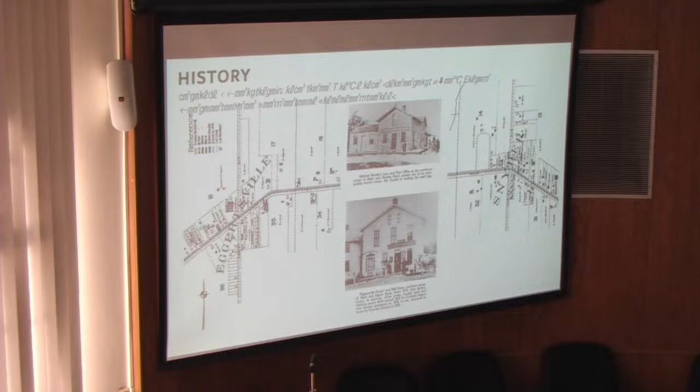I know you're giving away some secret algorithm here. Shocked that our account's PowerPoint fonts aren't... I don't think it's a funny font either, I'm really surprised, I think it's like Arial. Shocked. Hopefully the PDF will be better. I'm sorry about that. It's okay, we're just going to take a minute to reload that. You're fine.

The Amherst Main Street final presentation. I'm more interested in the Fort Myers coastal Florida one. I can give you that one later.

Yeah, you may want to try the PDF, the PowerPoint might have the same issue. Well, that looked like he was running off of the PDF, so I'm wondering if it was our Acrobat that was misreading it.

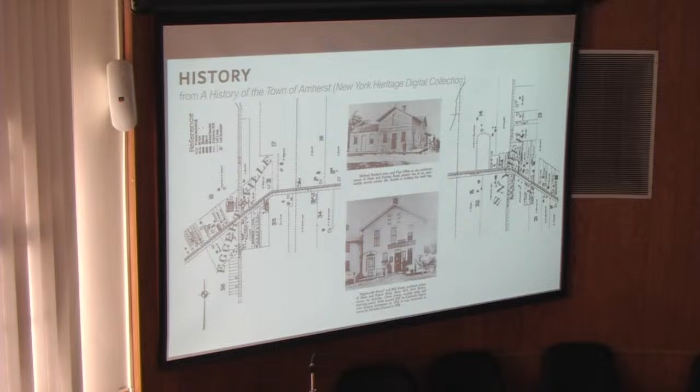As I mentioned, this was the study area. We looked back at all of the history of planning that's been done for this area, including the action plans done in the early 2000s, looking at the comp plan, building upon all of this past work and thinking about the plan for the corridor. An important study we looked at was the regional transportation pedestrian bike plan for Buffalo, Niagara. This corridor is set as what they call a tier 2 bike route, important from Bailey all the way to Harlem Road. So something we're thinking about is helping implement that idea, improving the bicycle conditions on the corridor.

I'm going to turn it over to Sarah now to walk through more of the existing conditions analysis. Thank you, everyone.

So we took a first look at the traffic analysis of the corridor, again from Main Street, from Bailey Avenue to Kensington Avenue. We set out and did turning movement counts, and ATRs, setting tubes out to collect speed, vehicle classification, and volume data, as well as pedestrian and bicycle counts. We did that in December of 2023. I'd like to point out that Main Street is a New York State DOT road. It is classified as a principal urban arterial, and it is on the national highway system. So that's something to keep in mind as we think about certain design criteria set by DOT, things like travel lane widths, shoulder widths, and bike accommodations, which will come into play later on.

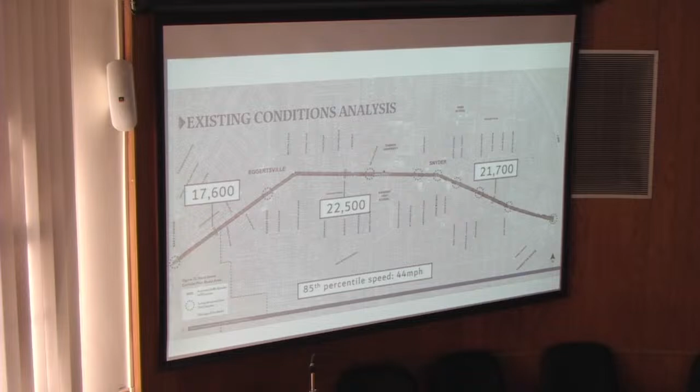We collected pedestrian and bicycle data and determined that the busiest pedestrian locations were at the intersections with Campus Drive, Harlem, and Chateau. We did not note any existing bicycle infrastructure, and bike counts were pretty low, which could be attributed to the fact that we collected the data in December of 2023. Here are the pedestrian and bicycle counts.

We also collected parking inventory on two different days: midday weekday data and evening weeknight data. This graphic shows the overall restrictions along the corridor, where parking is allowed, where it isn't, and where there are restrictions on how long you can park. We have a summary in our executive summary about how many vehicles actually occupy those spaces, and I think you might be surprised to see it's pretty low overall, given the number of spaces available compared to how many were actually occupied during the day and evening.

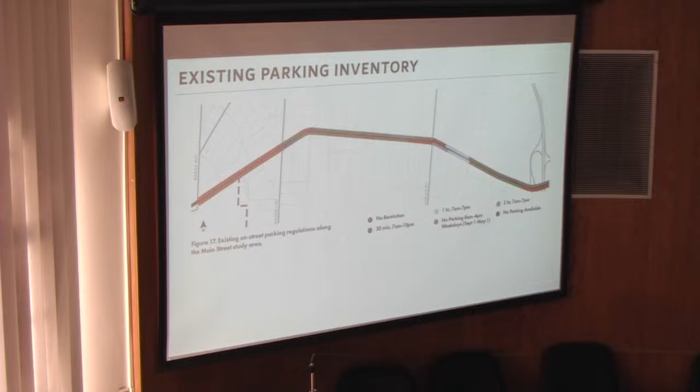We also collected existing signage data, going through and inventorying every single sign out in the corridor. My understanding is some of these have changed since then, but we noted regulatory, warning, guide, and other signs. Some are required, like speed limit signs or no parking signs, while others are more guiding, like signs for a library or a welcome sign. We noted all of that because part of the corridor plan is addressing sign clutter and what we can do about it.

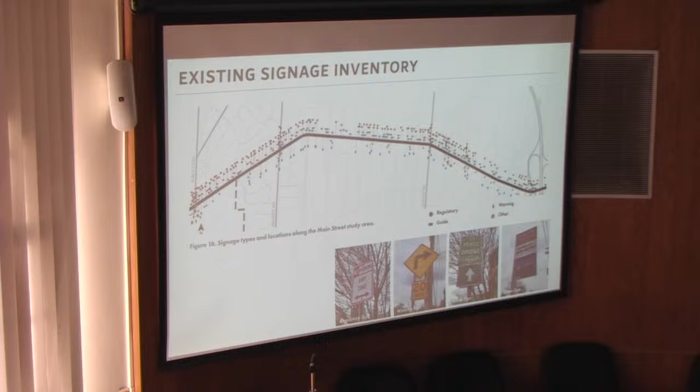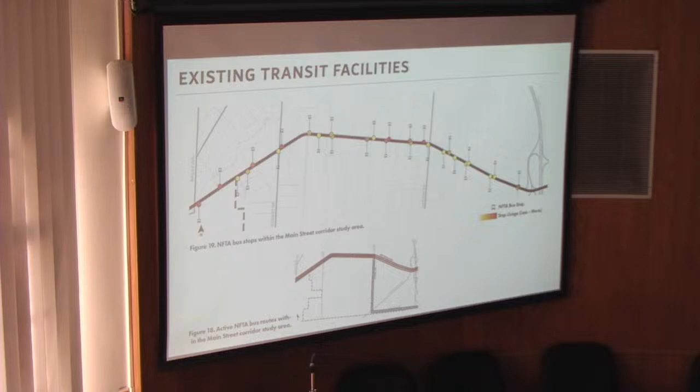We looked at the existing transit facilities. NFTA has two routes that run this corridor, and we were able to get data from them on their on and off averages per day, showing which stops are utilized more than others. You can see that information here in the graphic, with red being the higher utilized areas and yellow being the less frequent stops. Overall we're seeing relatively lower numbers on this corridor, but it's good to have that data to build into our overall recommendations.

We generally looked at vehicle crashes along the corridor to see where there were some hot spots, and you can see it's pretty frequent where those crashes could be happening. We didn't get into a full crash study on this, but it is part of one of our recommendations for the future that could be looked at.

And I'll turn it back to Amy.

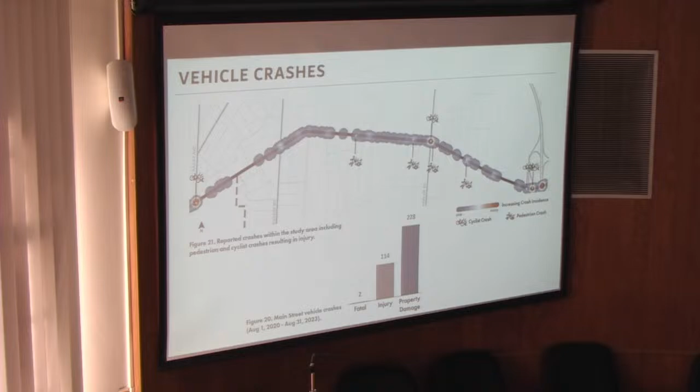As Dan mentioned, we started with a charrette last January at Daemen University, and had a good crowd come together. We asked them if they were residents, business owners, or property owners, and most were two or more of those. Also important to note, 80% of the folks, when we asked which intersection they live closest to, many were from the area around Main and Harlem. We thought that was interesting to note.

We asked how they use the corridor, and with conditions as they are today, 86% drive daily. Not many folks at that meeting came by bus, so we did some additional outreach, talking with the folks from the transit agency to learn more about priorities on the corridor. 48% walked daily. There was some discussion about the weather when it comes to bikes, and if we'd asked this question not in January we might have gotten different answers, but there were some folks who biked.

Importantly, we asked if there were better conditions for walking and biking, would people want to use those facilities, and 75% said yes. We also asked about what's important for the future design of Main Street. We gave them a long list of things to choose from, and safety, improving safety, reducing speeds, and having safe crossings came to the top of the list.

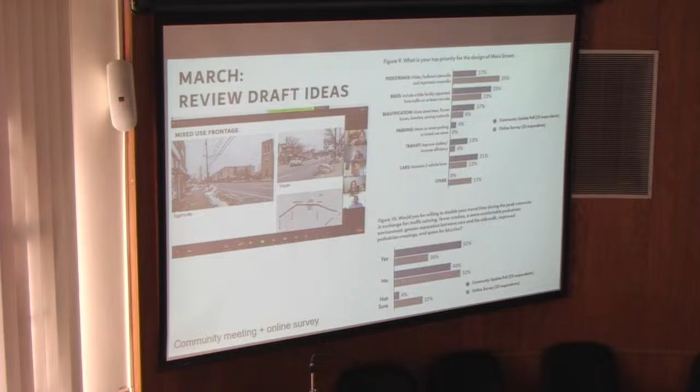Lots of discussion of beautification, landscaping, street trees, and then some talk about improving transit along the corridor. We then followed that by having a couple of days of an on-site studio where we had additional stakeholder meetings and invited folks from the community to come in and talk further with us and share their ideas. From all that feedback, we did some draft designs, and then in March we had an online meeting where we reviewed a couple of cross sections that I'll share with you shortly, and got feedback from those. And all of that input informed the final report that you see, which includes a summary of all the work done, plus a draft concept plan laid out across the corridor.

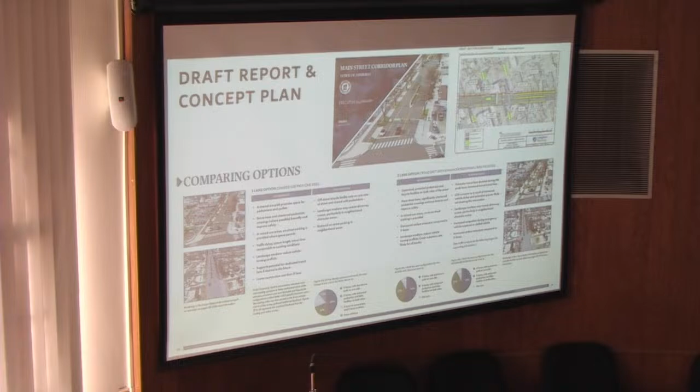So talking about the design ideas, I started talking about the history of the corridor and how there's these different areas. What we realized pretty quickly is that there's not going to be one solution that works along the entire corridor, so we've divided it into a few different areas: the mixed-use frontage areas, which are the darkest blue, and the neighborhood frontage areas, which are the light blue. The neighborhood frontage is where buildings are set back further, with front yards, a different feel than the mixed-use area where buildings are up to the street with commercial uses. A third area, the university, is kind of a hybrid of those, and I'll get into that in a minute. But I'm going to walk through each section, starting with the mixed-use area.

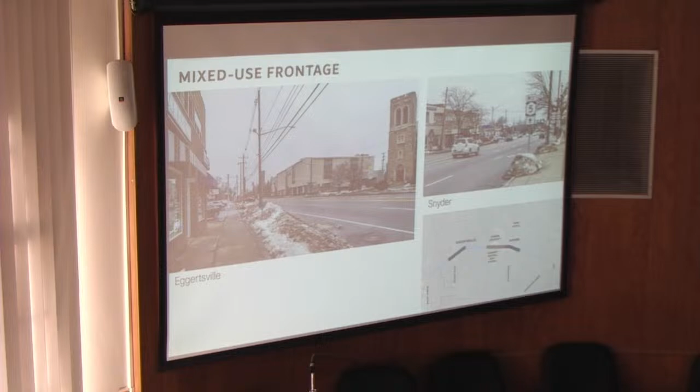Again, the areas near Eggertsville and Snyder, and this is the cross-section. Looking at the top, that's the existing conditions, and below is the proposed. The couple of big ideas, I guess pointing over here: looking at the right side of the road, adding a 10 to 15 foot shared use path, a dedicated facility for pedestrians and cyclists that's buffered from the street with a planting area along the entire north side of the road. So that's the big intervention. Plus, you'll notice another difference from existing to proposed is, where possible, adding medians into the center of the street space.

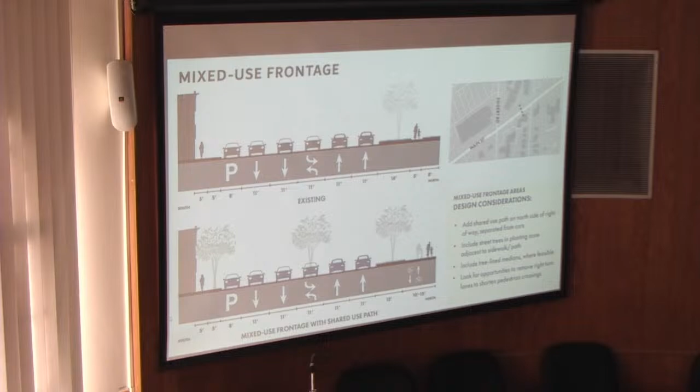We also thought about the long-term future. What if there's an opportunity for including dedicated transit lanes? This idea of keeping 2 lanes in each direction means that in the future, if this becomes a transit corridor, you could have dedicated transit lanes going in each direction.

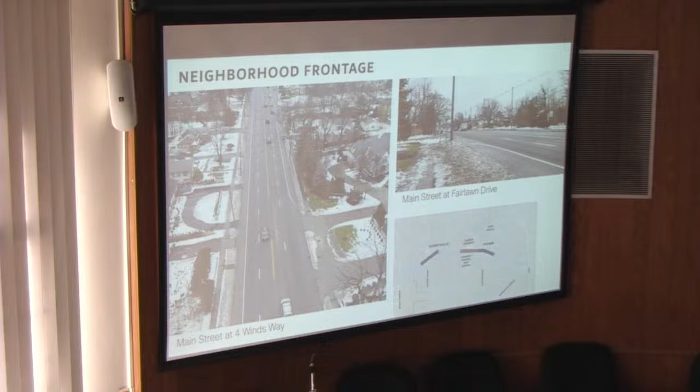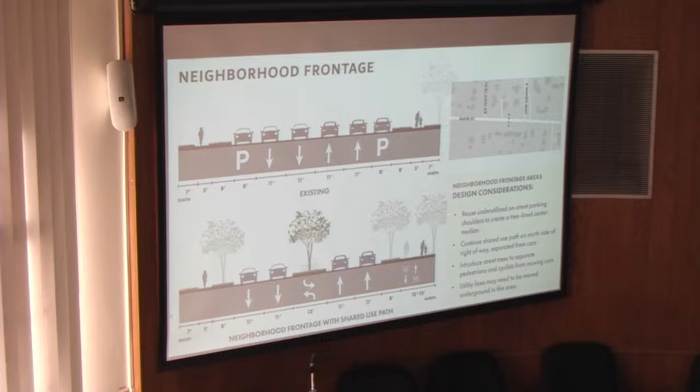So looking now at the neighborhood frontage, this is the area just west of Daemen University near Four Winds Way. You can see the conditions are a little different - buildings are set back. This is the existing conditions at the top and the proposed conditions at the bottom. The big differences here are looking at moving, still having 2 lanes in each direction, but having a dedicated median space in the middle for trees, and still having that dedicated 12 to 15 foot shared use path on the north side of the road.

And again, there is that opportunity that in the future, should this become a transit corridor, we could still have space to have transit lanes in each direction as well.

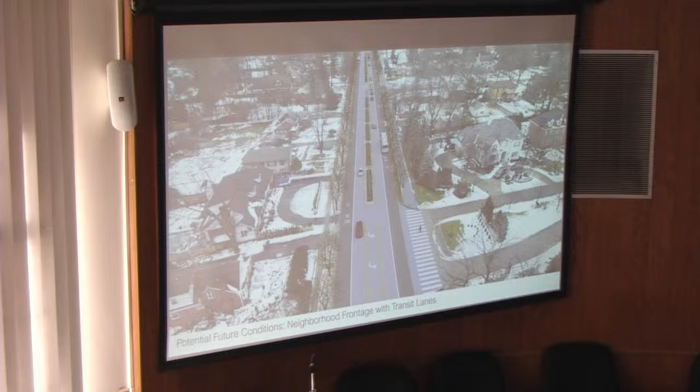There was a lot of discussion about landscape medians. The idea for beautification had a lot of support, but also some concerns about maintenance. So we discussed how to make that easier. The ideas in the report are that there's not planted grass, but rather landscaping that wouldn't require that level of mowing and maintenance.

But the important thing is to have trees, which provide a visual cue to slow speeds down, which was one of the big ideas. So you might notice in the drawings, the medians still include trees, but they were just shown without a grassy strip in the middle.

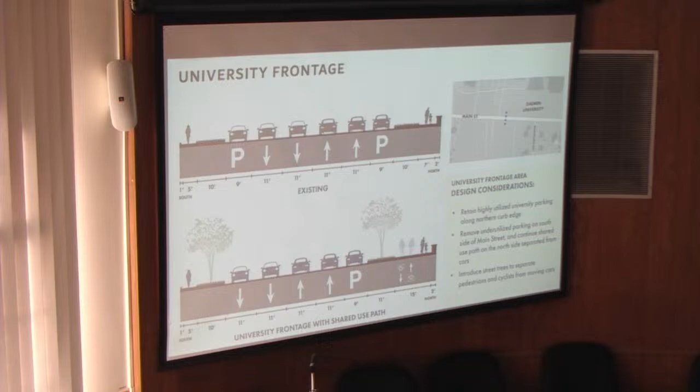We also, in March, when we presented ideas, showed what we call a road diet, where we take 2 of the travel lanes and reuse them for other things. So in this scenario you would have 1 vehicular lane in each direction, and then have a wider space for dedicated bike lanes in each direction, plus sidewalks, plus landscaping.

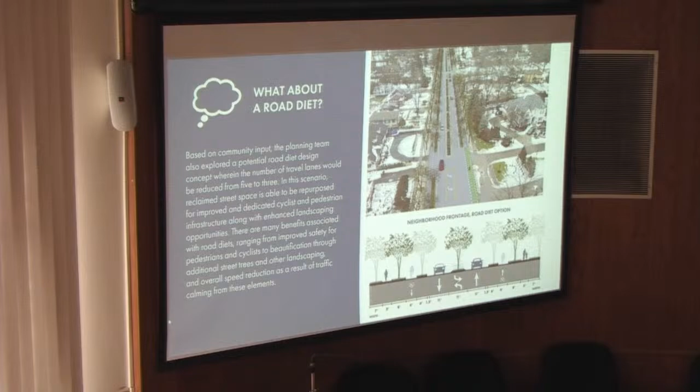So this is the illustration for the mixed use frontage, and this one is the illustration for the neighborhood frontage. This was the ideas we presented in March to the community, because we did want to get feedback. There are trade-offs with every design solution that you have to accept, so you have to make some decisions about what's most important. We wanted to get some feedback before we moved forward.

And so I'm going to ask Sarah to come up and walk us through some of the analysis that went into that.

So in order to evaluate if we could consider a road diet for this corridor, using all the traffic data I mentioned that we collected, we looked at multiple considerations for the corridor, including level of service, delay, queue, travel run time, and carbon emissions. Those are all factors that would help us evaluate and present to the public the different options, the alternatives between a 5-lane section and a 3-lane road diet section.

Based on traffic data that we collected, we did see a peak volume of traffic from 7 to 5 every day. So it wasn't just an AM peak and a PM peak, it really was a high concentration of vehicular volume throughout the day.

We also looked at level of service, understanding the delay of a vehicle at a signalized or unsignalized intersection. We specifically looked at 10 signalized intersections along this corridor, keeping in mind level of service A really being a priority for vehicles and not as great an environment for pedestrians or cyclists, whereas an E or an F is a much slower experience.

You might have to sit at a signal for 1 or 2 cycles as a motorist, but it is a much slower environment for pedestrians and cyclists to maneuver through.

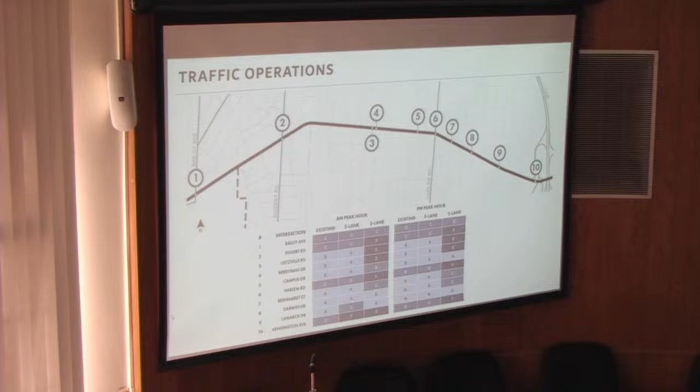We also calculated corridor travel time, the length of time it would take for a vehicle to get from one end of the corridor to the other. We went in both directions, from Bailey to Kensington and back.

And with that, we saw that the increase in travel time to get from point A to point B doubled from existing conditions in the future 3-lane section. We're seeing that the 5-lane section remains relatively the same, if not better.

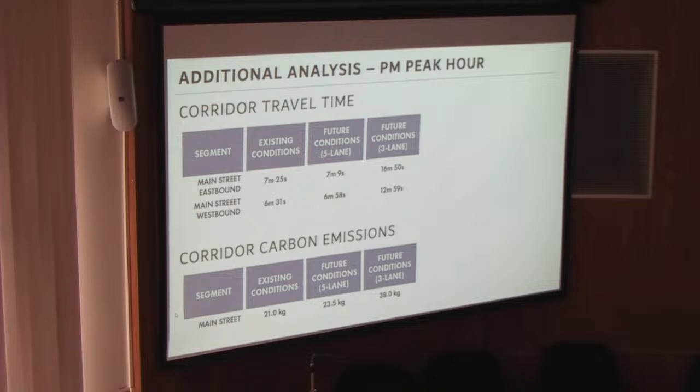We also looked at carbon emissions. Again, that's another factor of looking at road diets and how many more vehicles are on the corridor for a longer period of time.

We're seeing that carbon emissions increased in both conditions, a little bit more in the 3-lane. So to compare some advantages and disadvantages of a 5-lane section: the shared use path, similar to the 3-lane, will provide space for pedestrians and cyclists.

We're able to provide street trees still and shorten crossings. We're still able to provide on-street parking in the mixed-use areas. We do see some traffic delay and queue distance, but pretty negligible changes compared to existing. Again, the landscape medians are available to reduce vehicle conflicts and provide a better environment along the corridor. And it does support the future of having a dedicated transit lane, by having the curb already wide enough for a 5-lane section to go down to a 3-lane with the bus.

We're also seeing lower construction costs with the 5 lanes than the 3-lane section, just based on what actually needs to be moved and the impacts of the corridor changing.

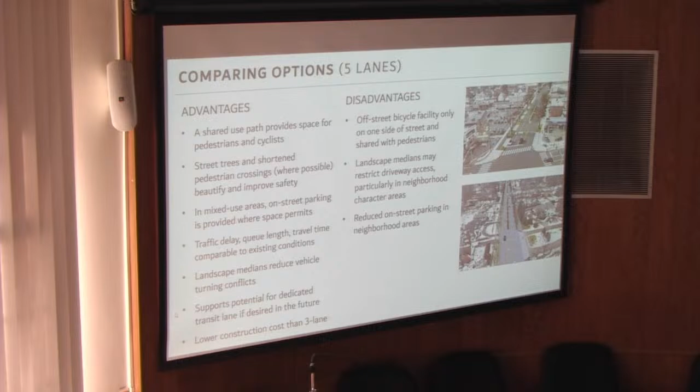Some disadvantages: the pedestrians and cyclists are together in the same area, so bicyclists don't have their own dedicated facility. The landscape medians may restrict some driveway access for people unable to take lefts out of their homes or businesses. And we did have to reduce on-street parking in neighborhood areas.

For the 3-lane section, we're seeing a lot more benefits for dedicated, separated pedestrian and bicyclist facilities, and a lot more opportunity for street trees to really enhance the corridor and provide a better environment for people to live, work, and exist there.

We're able to provide more on-street parking because of where we're able to pull in the travel lanes. There's more opportunity to bump out where we need parking. And the landscape medians will reduce conflicts and help with crash reduction.

With that, we do have some disadvantages. As I mentioned, the travel time almost doubled during the PM peak hour, which will also increase transit travel time. With the level of service worsening, that could increase vehicular delay and frustration, and the landscape medians may restrict driveway access, similar to the 5-lane section.

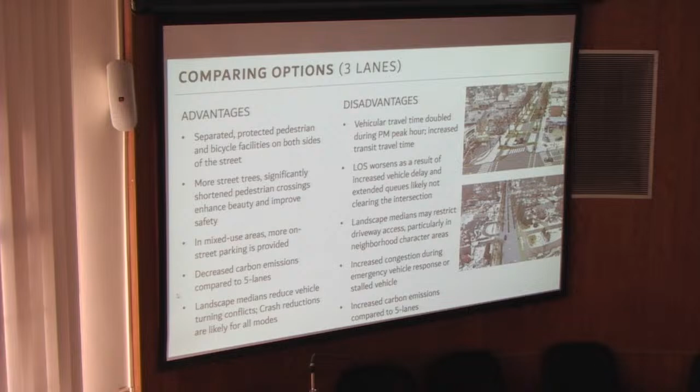And again, with the road diet, we need some finesse to make sure we have enough width for emergency vehicle response, snow storage, and the things required of any corridor—but specifically this is a DOT National Highway System corridor. So to compare those options, we didn't want to make a decision.

We brought that to the public in the March meeting and presented the options. We're seeing that in the darker blue shading, half of the public really did favor the 5-lane section.

We asked the question: would you prefer to have a dedicated pedestrian and bicyclist facility but have an increased travel time to get from point A to point B? Again, 50% of the people did side with the 5-lane section, but we did see a lot of interest still in the 3-lane section, actually road dieting the corridor.

With that, we made the decision as a stakeholder group and as a team to move forward with the 5-lane section. We took it to the next step of advancing the plans and actually laying out the entire corridor in CAD line work, determining where the landscape medians would be, where the lane closures may be, and all the improvements that build into applying these different sections to each corridor.

And so this is just a snapshot of what those plans look like. They are to scale and laid out based on aerial-based mapping.

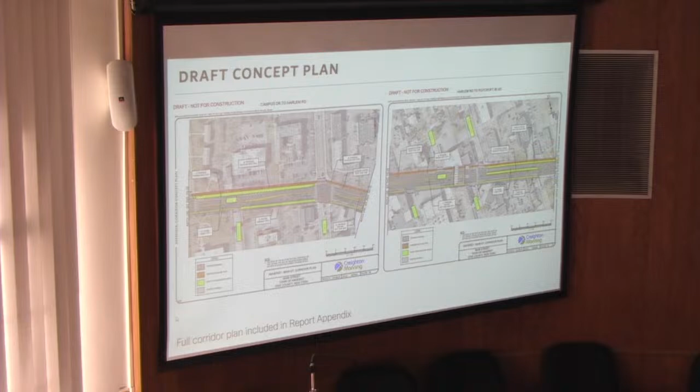So that leads us to the question: how can these concepts be refined? We picked 3 general sections throughout the corridor. It's a 2.5-mile long corridor, so there are opportunities for making improvements in specific areas that can come in the future.

And that can be done through eventually getting survey as part of the town and really looking at further existing conditions information.

We could split the median around that tree to maintain and protect it. There's other opportunity, you'll see along the plan view, where some areas have landscape medians that alternate into two-way left turn or dedicated left turns based on traffic needs and business access. So there's a lot of modifications to the typical sections that were already presented.